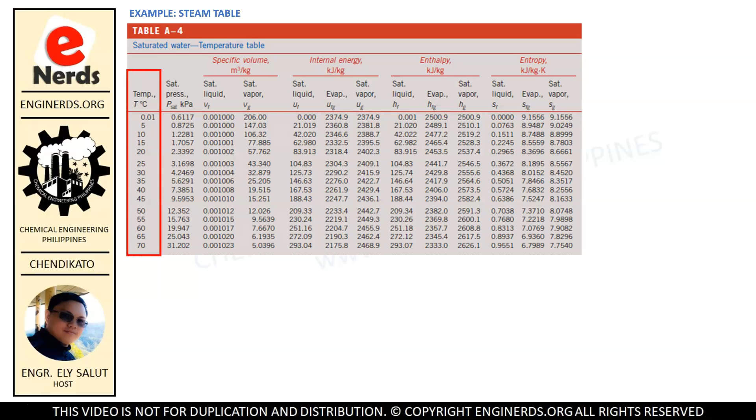Bakit ba natin kailangan pag-usapan yung different terminologies sa steam table? Guys, this is an example of the saturated steam table. Dito, may makikita tayong iba't ibang terminologies as well as different symbols na mahalagang malaman natin bago natin magamit yung steam table. On the left side, you will see a column of temperature. This is what we call the saturation temperature, and we are going to discuss that later on this video.

And after that, we have what we call the saturation pressure. Then, sa bandang taas, makikita ninyo yung iba't ibang properties dito: merong specific volume, internal energy, enthalpy, and entropy. Ito yung mga properties na makukuha natin once we use the steam table given the temperature or pressure. If you check on the symbols, you will find sub-labels there na F, G, or FG, and that is present in different properties in specific volume, internal energy, enthalpy, and entropy.

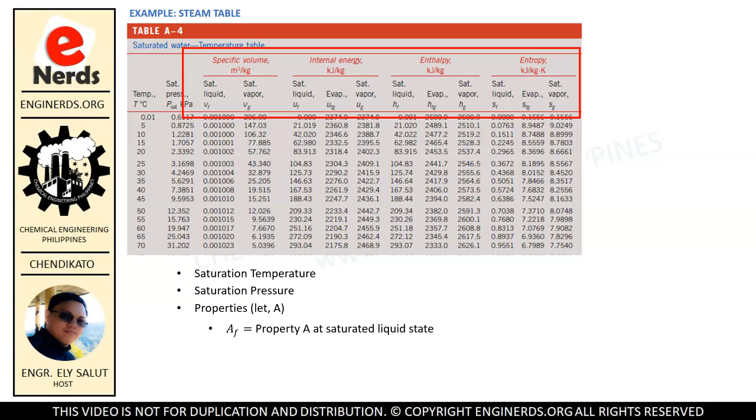To represent any of these properties, let us call it A, okay? And then, those properties na nakikita nating may sub-label na F, those are the property at saturated liquid state. At yung property naman na may subscript na G, those are the property at saturated vapor state. Ano naman yung merong subscript na FG? It represents the property while changing phase from saturated liquid to saturated vapor. We are going to discuss that further on this video para mas maintindihan natin kung ano ba ang ibig sabihin ng mga subscript na yan.

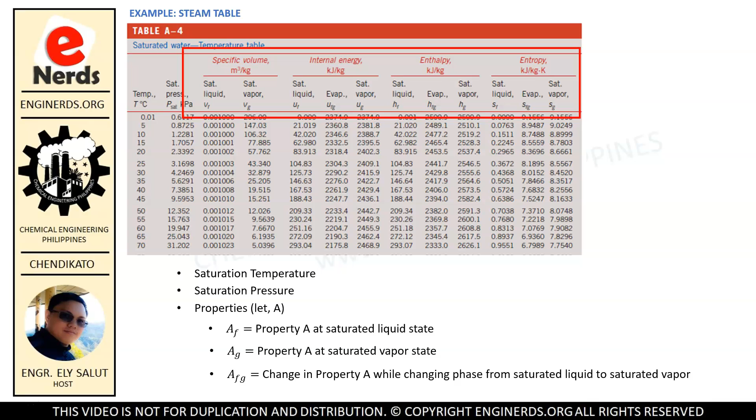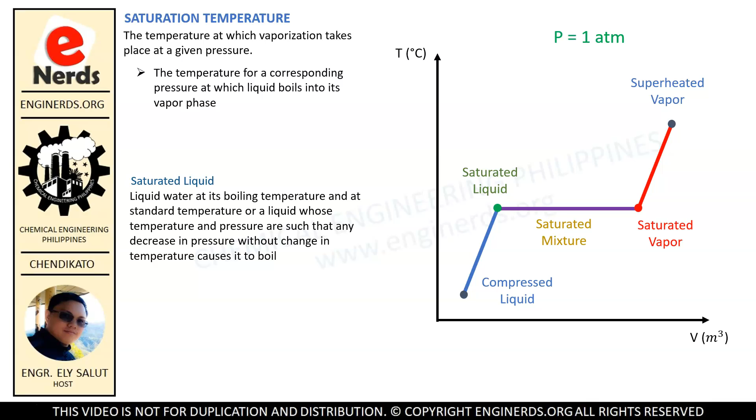As I mentioned earlier, in this example we are maintaining the pressure at 1 atmosphere. At a particular pressure, there is a corresponding temperature at which vaporization will take place. That happens at this green dot here, which we call the saturated liquid. At that temperature, vaporization starts to take place, and that temperature is what we call the saturation temperature.

Now you'll notice a horizontal line from the saturated liquid going to the red dot, which we call the saturated vapor. Notice that this is maintained at the same temperature, so we are still talking about the saturation temperature. There is a phase change from the green dot going to the red dot: the green dot is the saturated liquid, and the red dot is the saturated vapor. That happens at this same temperature, which we call the saturation temperature.

So what is the saturated vapor? That is the red dot we see on this graph. If a substance exists as a vapor at saturation temperature, or as vapor at standard atmospheric pressure and at its boiling temperature, that is what we mean by saturated vapor. It is when the substance exists as a vapor at the saturation temperature.

I hope that is clear in our discussion. In saturated liquid, the substance exists as a liquid at the saturation temperature. And the saturated vapor is where the substance exists as a vapor at the saturation temperature.

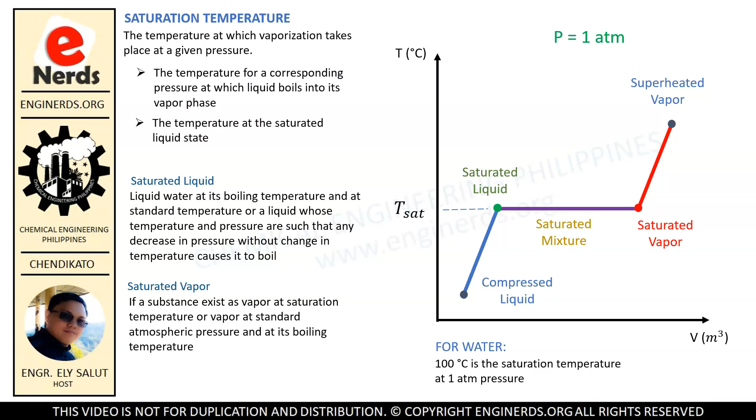Now let's go ahead and discuss the saturation pressure. The saturation pressure is the pressure at which vaporization takes place at a given temperature. It's basically the same as the saturation temperature definition we gave earlier, but the other way around. Earlier we mentioned that at a given pressure, there is a corresponding saturation temperature at which vaporization will take place. This time, at a given temperature, there is a corresponding pressure at which vaporization will take place.

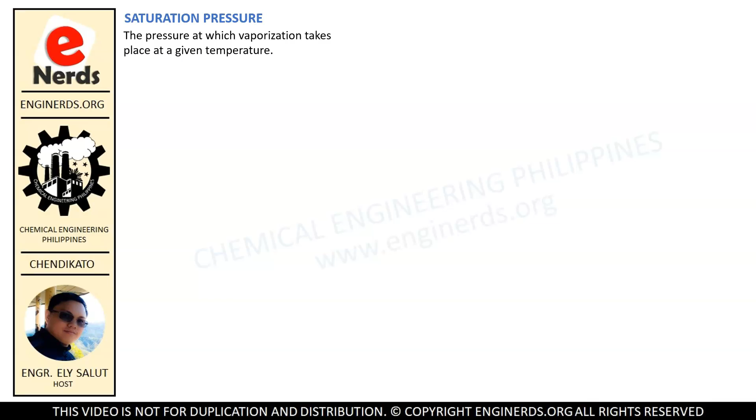It is also defined in other references as the pressure at the saturated liquid state. So for water, for example, 1 atmosphere is the saturation pressure at a temperature of 100 degrees Celsius. It's just the other way of stating our previous example.

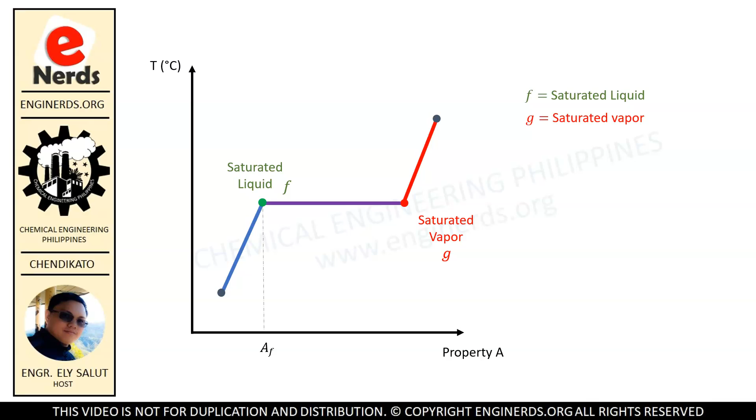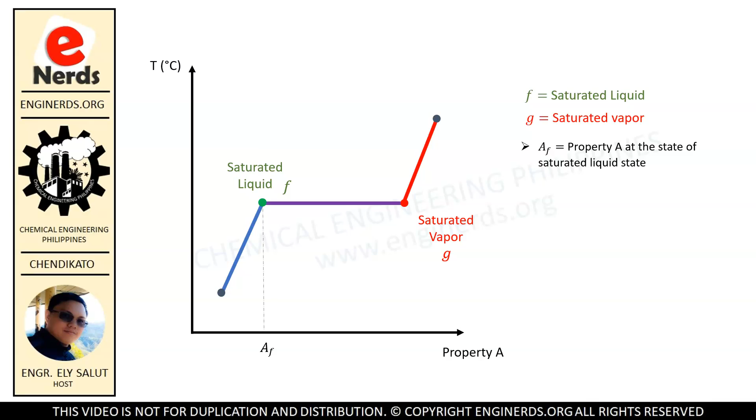The subscript F stands for the saturated liquid, and the subscript G stands for the saturated vapor. So if we apply it to property A, we will have property A with a subscript F, meaning property A at the saturated liquid state. Now it should be clearer what these subscripts mean.

Applying it from the saturated vapor state, we have property A with a subscript of G, which is the property A at the saturated vapor state. And when it has a subscript of Fg, that means A with subscript Fg represents the change in property A while changing phase from saturated liquid to saturated vapor.

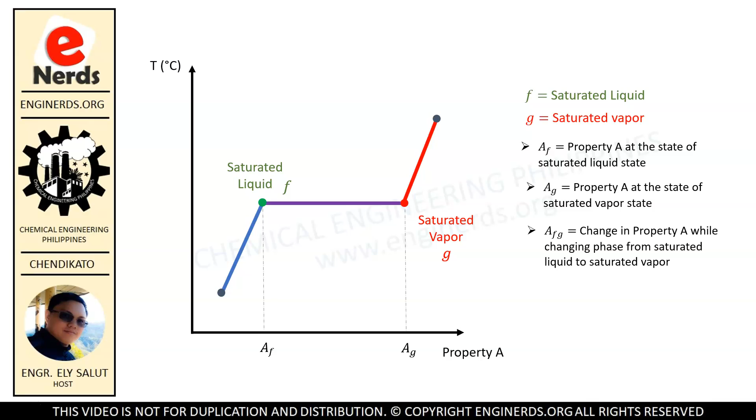I hope it's clear what these terminologies mean in the steam table. But we also encountered other terminologies during our earlier discussion. Let's talk about those other terminologies, looking at the graph we used earlier, where we saw other terms.

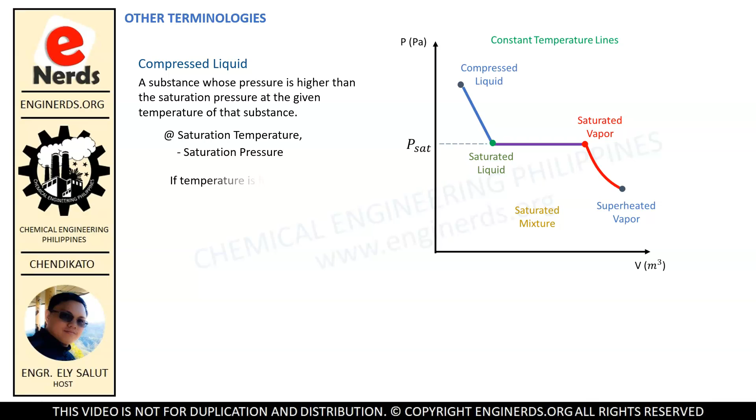Let's discuss what we call compressed liquid. Compressed liquid is a substance whose pressure is higher than the saturation pressure at a given temperature. Earlier we discussed that at a given temperature, there is a corresponding pressure at which vaporization will start, and that is the saturation pressure. Now, at that given temperature, if the pressure is higher than the saturation pressure, that is called compressed liquid. So if temperature is held constant at the saturation temperature, and pressure is increased beyond the saturation pressure, the substance is called compressed liquid. Therefore, if pressure is greater than the saturation pressure at a given saturation temperature, that is compressed liquid.

Let's give an example. At 100 degrees Celsius, the saturation pressure is equal to 1 atmosphere, which we already know. Now, temperature is held constant at 100 degrees Celsius, and pressure is increased to 2 atmosphere. So our new condition is temperature 100 degrees Celsius and pressure 2 atmosphere. We can see that the pressure is now greater than the saturation pressure, because at 100 degrees Celsius, the saturation pressure is 1 atmosphere. So that means our new condition is a compressed liquid.

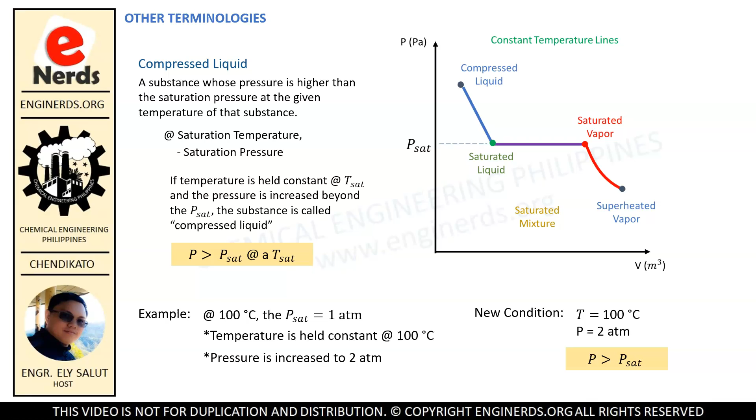Again, from this graph, we have seen what we call superheated vapor. What is a superheated vapor? A superheated vapor is a vapor whose temperature is higher than the saturation temperature at a given pressure. A superheated vapor absorbs more heat than is needed to vaporize. So again, we have a saturation temperature and pressure. If we maintain the pressure constant and increase the temperature, the temperature will be greater than the saturation temperature, and that is called superheated vapor.

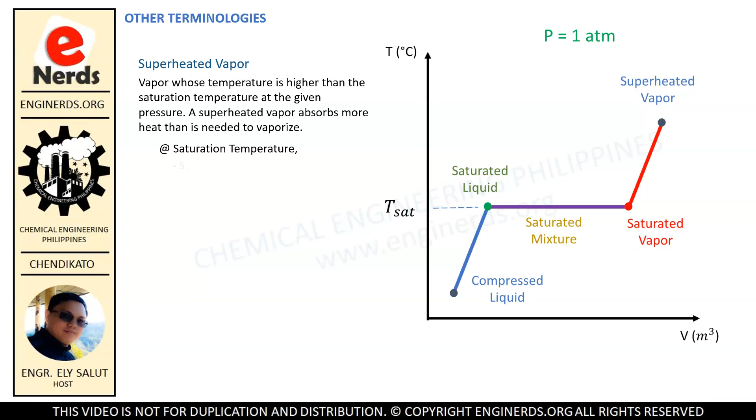So, at the saturation temperature, we have a corresponding saturation pressure. Now, if the pressure is held constant at the saturation pressure, and the temperature is increased beyond the saturation temperature, the substance is called superheated vapor. That means the temperature is greater than the saturation temperature at the saturation pressure.

Let's make an example. At a pressure of 1 atmosphere, we know the saturation temperature is 100 degrees Celsius. Now, consider that the pressure is held constant at 1 atmosphere, and we increase the temperature to 120 degrees Celsius. So now our new condition is temperature 120 degrees Celsius at 1 atmosphere. Therefore, our temperature is now greater than the saturation temperature, which is 100 degrees Celsius at 1 atmosphere. Therefore, our new condition is a superheated vapor.

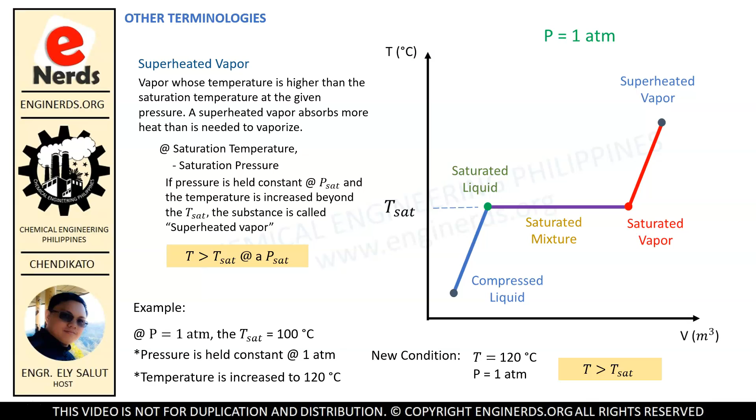This is the end of part 1, where we discussed the terminologies we encounter when using the steam table. In our next video, we will discuss how to use the steam table.